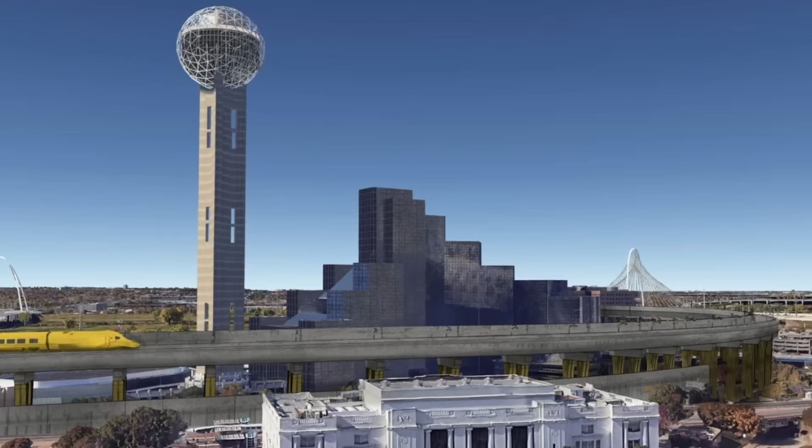That is because the TCR station is planned to be elevated, and to successfully reach that station through downtown, DFWHST will need to be on viaduct that could exceed a height of 100 feet. This has offended a local developer that owns adjacent land, and also the Dallas City Council, which has understandably balked at a huge viaduct running through their downtown.

Beyond those difficulties, this already short high-speed rail line would stop in Arlington about midway, producing runs of 13 and 19 miles. That is barely enough distance to get up to speed, and in fact that project probably won't exceed 160 miles per hour in service.

Now, if you connect this to Houston via TCR, then you have a Fort Worth to Houston connection with 3 stops, servicing metro areas totaling 15 million people, and the utility becomes more obvious.

To argue against DFWHST and for a better alternative, I'm going to refer to the Dallas-Fort Worth Core Express Service Alternatives Report, commissioned by the Federal Railroad Administration in 2017.

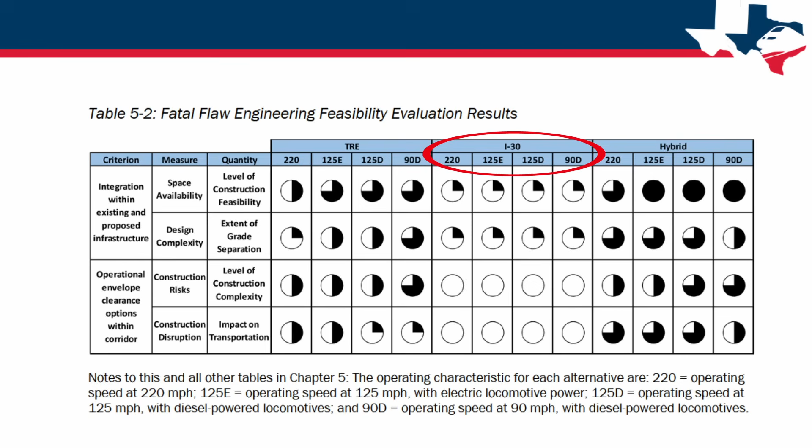This report states that the DFWHST Interstate 30 routing is not even reasonable enough to make it past the first round of considerations. The report found the concept to be too expensive, too complex, and too challenging from an engineering standpoint.

Though it would be about 20 minutes end to end, in my Texas to Arkansas high-speed rail video I estimated cost at $12.1 billion in 2028 dollars, which works out to almost $400 million per mile.

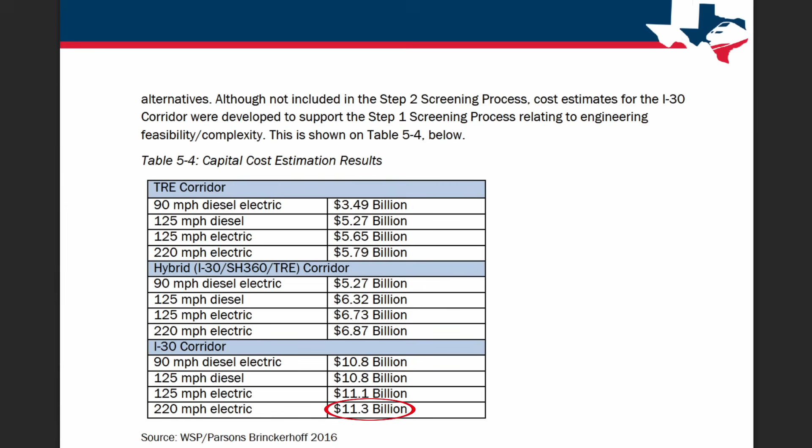The Core Express study put this at $11 billion in 2016 dollars, which works out to about $15 billion in 2028 dollars. Keep in mind, that's ending up at a Dallas station potentially connected to nothing.

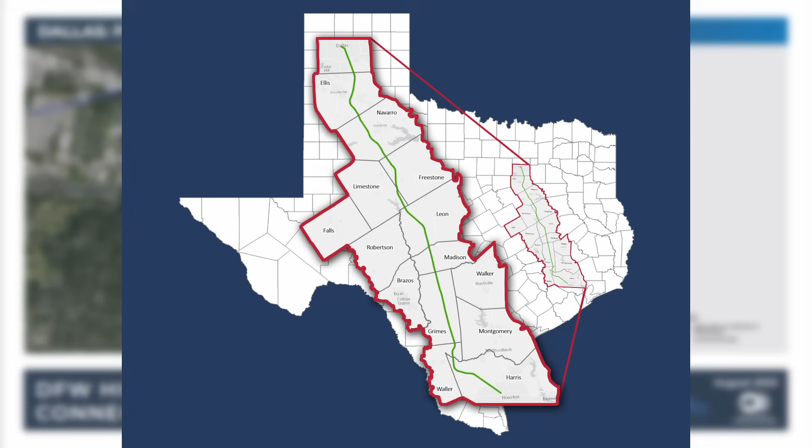Two other routing alternatives were considered: the current Trinity Railway Express alignment, and then a hybrid of Interstate 30 and the TRE route bridged by SH 360 in the middle.

Those were combined with 4 service options: 90 mile per hour diesel electric, 125 mile per hour electric and not, and then 220 mile per hour electric high-speed rail.

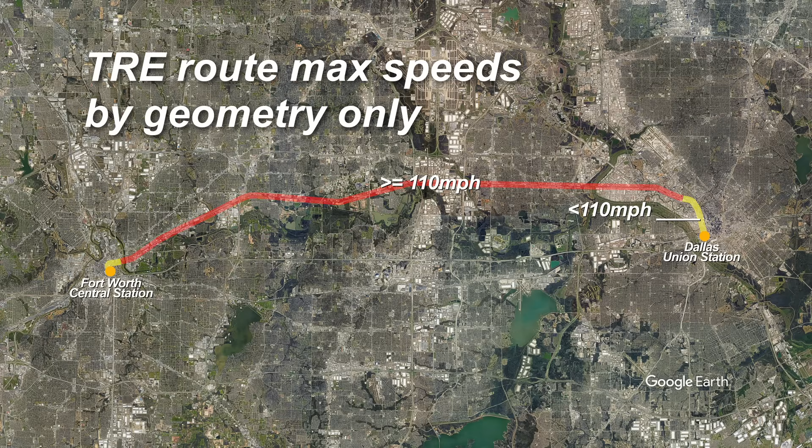I'm going to throw a monkey wrench in the works and pick 110 mile per hour diesel electric. First of all, the current geometry of the TRE route supports 110 mile per hour travel over about 85% of its distance. The routes in the study are relatively expensive due to grade separation work for the 125 and 220 mile per hour options. They also tried too hard to separate passenger out from freight.

The hybrid routing option is tempting with its connection to Arlington attractions, but it shares some of the I-30 route's capital expense problems, and its more circuitous route is slower. I say if Arlington wants to pick up the tab, then go for it. As a result, my option would end up looking a lot more like the study's 90 mile per hour TRE option.

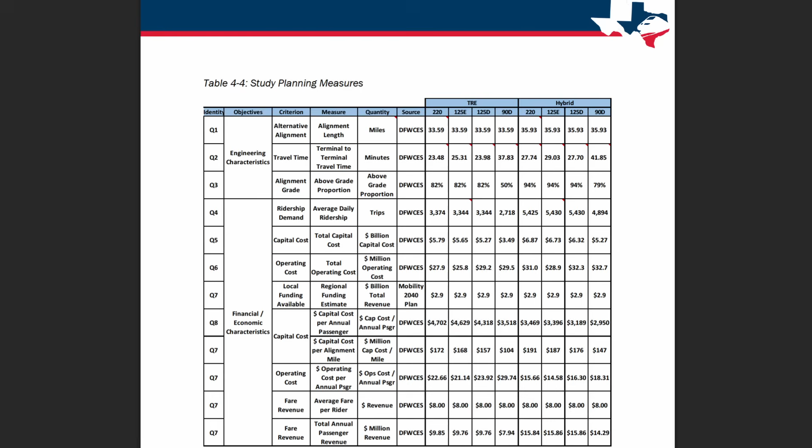Let's point out right off the bat that the existing 79 mile per hour service takes 1 hour between Fort Worth and Dallas as a local. The study has a 90 mile per hour express at 38 minutes. The study has between 3 and 5 stops for the TRE route, but the current route has 10 stations, so it just depends what kind of service you prefer.

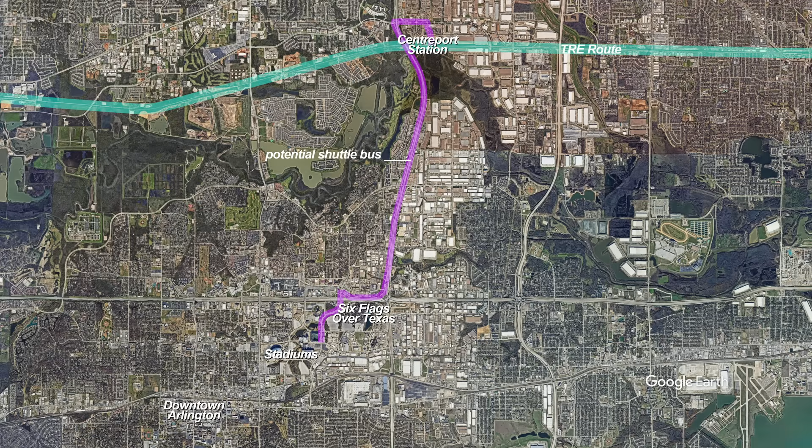For this example, I'm going with an express that stops in the middle at CentrePort Station, which connects to DFW International 5 miles to the north by shuttle bus. On either end would be Fort Worth Central Station and Eddie Bernice Johnson Union Station in Dallas. Fort Worth is currently talking about a streetcar system that would likely connect to Central Station. Union Station in Dallas connects to Dallas's DART light rail system. A 6-mile shuttle bus ride would get you from CentrePort to Arlington attractions, but Arlington doesn't have any local public transit.

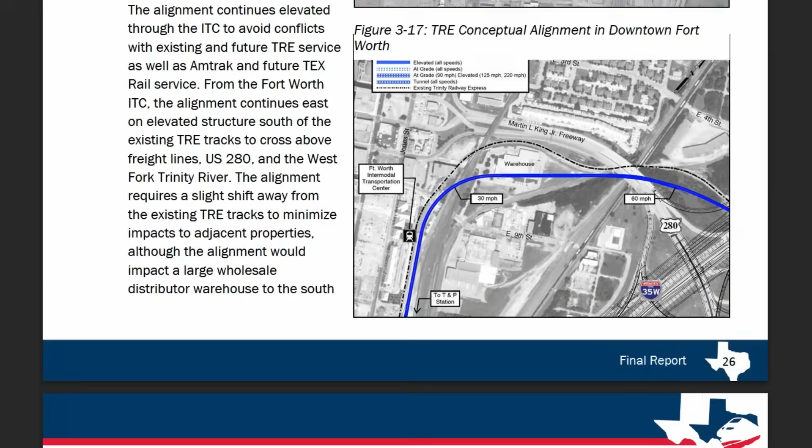Let's work through the alignment described in the Core Express study, and I will visualize it with some changes. Fort Worth T&P Station, we're going to skip it because it's only 3/4 of a mile from Fort Worth Central. You can add it in if you want. TRE's website has that taking 3 minutes to transit.

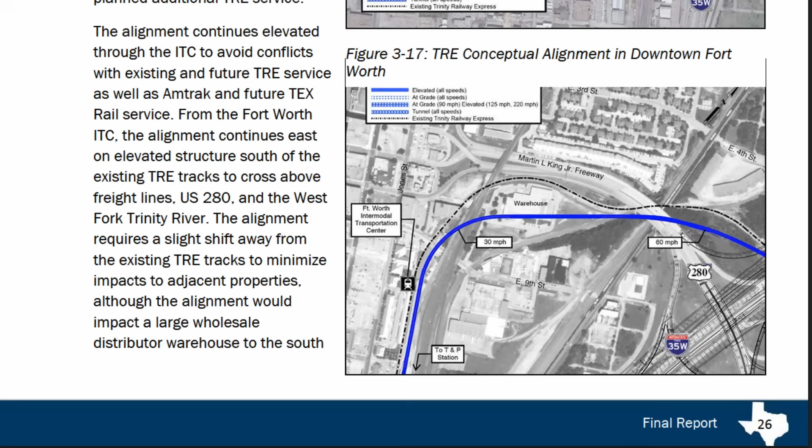The Core Express study attempts to completely separate from the existing service and ends up with 3 miles of high viaduct and a raised station in downtown Fort Worth. I know Texas loves layered viaduct, but we're going to stop the insanity and stick with the existing setup in and out of Fort Worth Central.

This is constrained to 2 tracks out of the station. There is a level rail crossing, and then TRE is constrained to 1 track for half a mile due to the insanely complex web of road and rail infrastructure there. It's slow, and the volume restriction is real for sure, but I'm looking at this as an option that could actually get done in a state that has actively been working against passenger rail for decades, so we'll stick with it.

After looking at it for a long time, I concluded the 100-foot high viaduct from the Core Express study is probably the best solution to expand capacity from Fort Worth Central to the east. That could be added later on, though.

The other alternative would be an underground station and 2 miles of tunnel, but then you start getting into DFWHST territory in terms of expense, because that route involves an underground station and about 3 miles of tunnel to get out of Fort Worth.

Existing TRE is alternating single double track. The double track sections are generally around stations and a couple of miles long. We're not going to worry about that because we're going to augment that with separate tracks. This could be anything from fully single tracked to fully double tracked, depending on scheduling and how it tied into the existing local tracks. That would start at the west fork of the Trinity River on the south side of existing tracks.

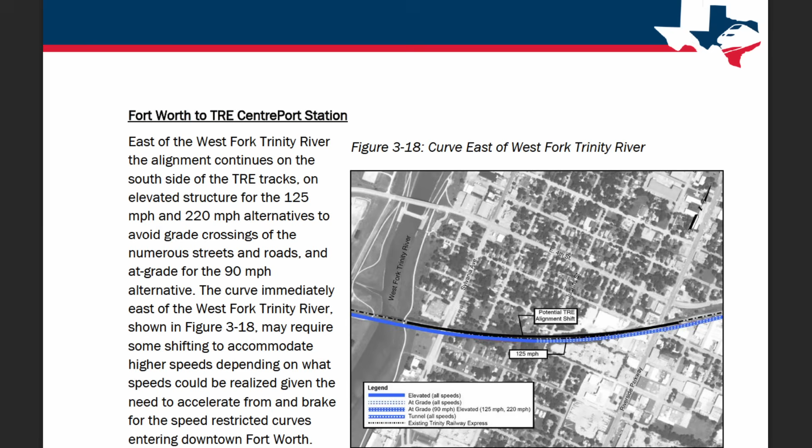The Core Express study shifts the existing tracks north and adds 2 more, which would take out quite a few buildings in the area. I will do the same, but keep the 2 new tracks in the right-of-way at a 79-mile-per-hour paradigm.

We're close to Fort Worth. You don't lose that much time doing this, but you do save money. After a half mile of that, the right-of-way widens, it becomes easier to fit everything, and we will accelerate to 110 miles per hour. The study has the new track switching sides at a nearby landfill, which I agree with.

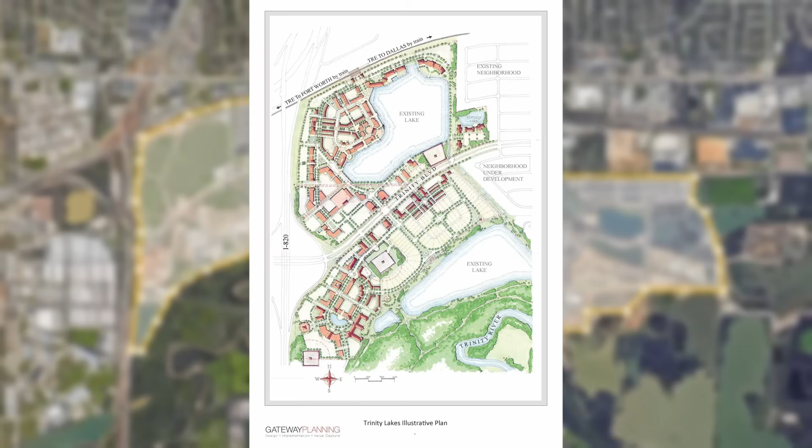The route would pass the new Trinity Lakes station on the north. There appears to be enough room to do that with 2 tracks. Trinity Lakes is an example of an initiative that the North Central Texas Council of Governments is pushing to encourage transit-oriented development along the TRE line. Trinity Lakes is a huge 1,600-acre development, mostly single-family homes, but it includes about 100 acres of walkable medium-density development around the station.

From there, our train would keep humming along at 110 miles per hour on the north side of existing tracks for another 7 miles until needing to cross over to the south side again. That would bring us into the CentrePort station, which our new track or tracks would integrate into, perhaps with a second island platform or a reconfiguration.

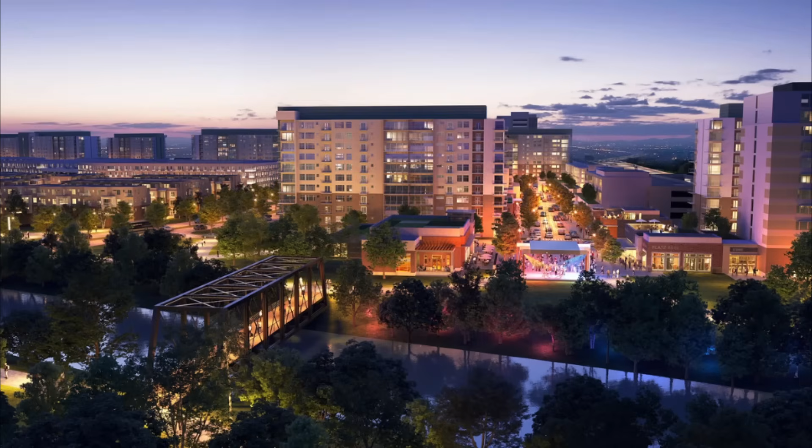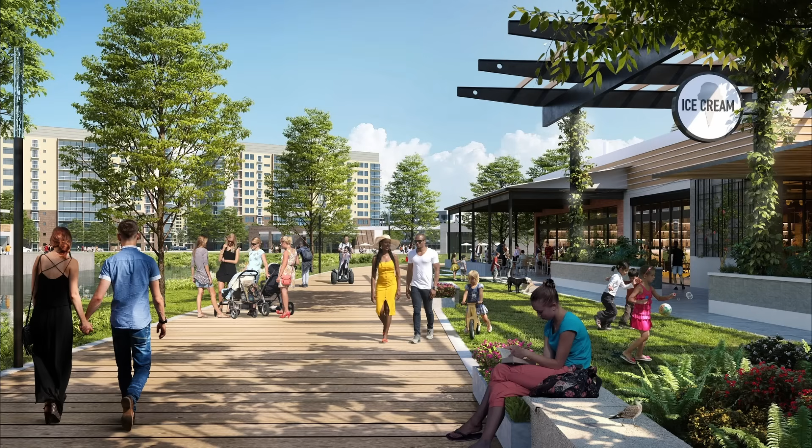Transit-oriented development is also planned here on the south side of the tracks in an odd area along the river, wedged between a bunch of warehouses. But I guess the Dallas-Fort Worth Metro is growing so fast, they're desperate for centralized residential.

Since we're stopping, let's check travel times. For Fort Worth to CentrePort, it is 17 miles. I have that taking 16 minutes for an average of 64 miles per hour. Compare that to 31 minutes currently. Recall that the Core Express 90 mile per hour option was 38 minutes end to end, which would produce 19 minutes Fort Worth to CentrePort. That puts the 110 mile per hour option up by 3 minutes.

The TRE Link bus service takes 16 minutes to get to Dallas-Fort Worth Terminal B, and it is coordinated with rail, so you'd be looking at 35 minutes downtown Fort Worth to DFW. Compare that to 46 and 50 minutes for TRE and Tex Rail currently, respectively.

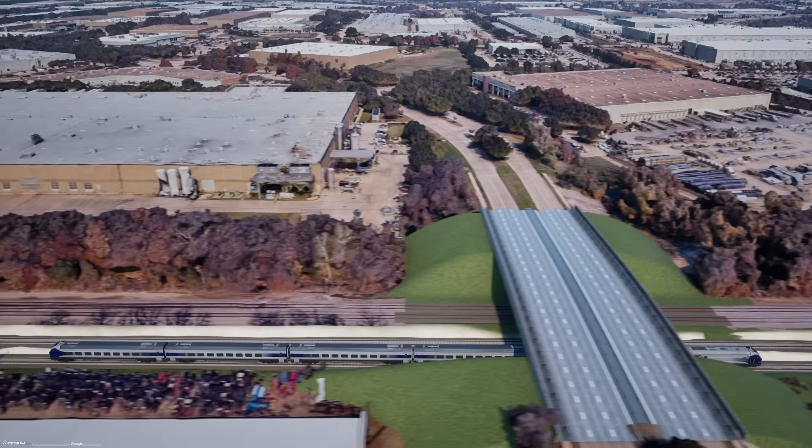Out of CentrePort to the east, this would require a rebuild of the Trinity Boulevard overcrossing, and the line would pass an existing TRE maintenance facility to the south. That would go under SR 161 and then pass the West Irving station on the south as well. Right after the West Irving station, we'd need to cross over to the north side to parallel some existing viaduct over 3 intersections before ducking under SR 356.

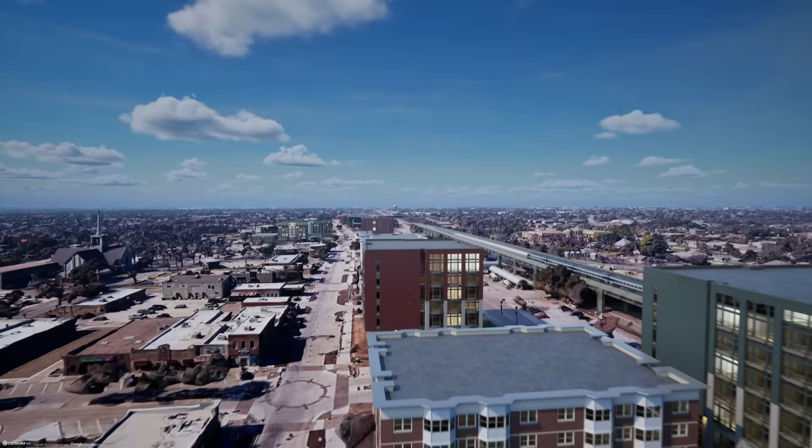East of SR 356, the Core Express suggests flying over a freight Y at the downtown Irving station, but I kind of like the idea of flying over a rebuilt station with upper and lower platforms. I think downtown Irving has a lot of potential right around the station. While I'm not including it in time calculations, if you had a 4th stop on a long-term express, this would be it for me. That will remain elevated through Nursery Road and then go back to ground level.

After the Elm Fork of the Trinity River, another flip to the north side to avoid a Dallas, Garland, and Northeastern Yard. One more switching of sides after crossing Interstate 35 East.

The Core Express study has tracks elevated through here, and I agree with that. I would have that come back to ground level and merge with existing TRE tracks just east of the Dart Market Center station, riding those TRE tracks into Eddie Bernice Johnson Union Station. The beauty of this idea is that future grade separation could still be done later, and viaducts on either end to increase capacity or to hook up with Texas Central in the 22nd century would still be possible, but in the meantime, you get a much faster express service in a much cheaper way than other options.

So we've made it to Dallas. Let's check those travel times. CentrePort to Dallas is 16 miles. I have that taking 15 minutes for an average of 64 miles per hour again. With TRE Link, that's 34 minutes from Dallas to DFW. Compare that with the Dart Orange line at 50 minutes. Fort Worth to Dallas would be 33 minutes with one stop at CentrePort for an average of 62 miles per hour. That is 5 minutes faster than the TRE route in the Core Express study, and only 13 minutes slower than a much more expensive I-30 HSR routing.

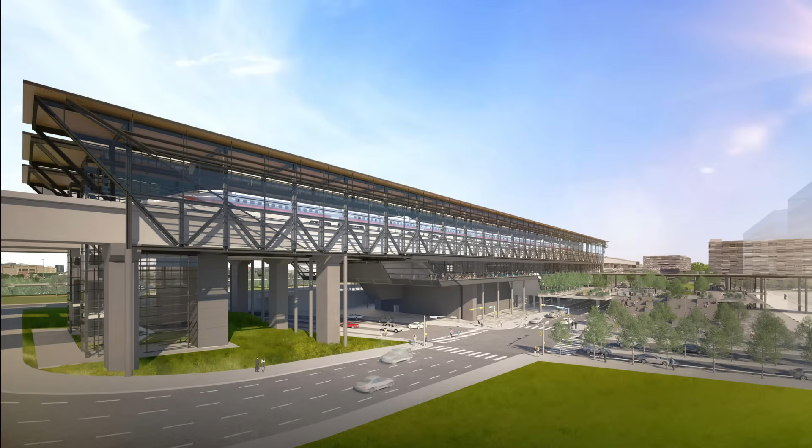Let's summarize to wrap things up. Of the alternatives, the North Central Texas Council of Governments picked the most expensive one by far, and it's pretty useless without a Texas Central Dallas station. Even with a Cedars station in place, this hypothetical 32-mile high-speed rail route would have little more use than a far cheaper alternative for a very long time.